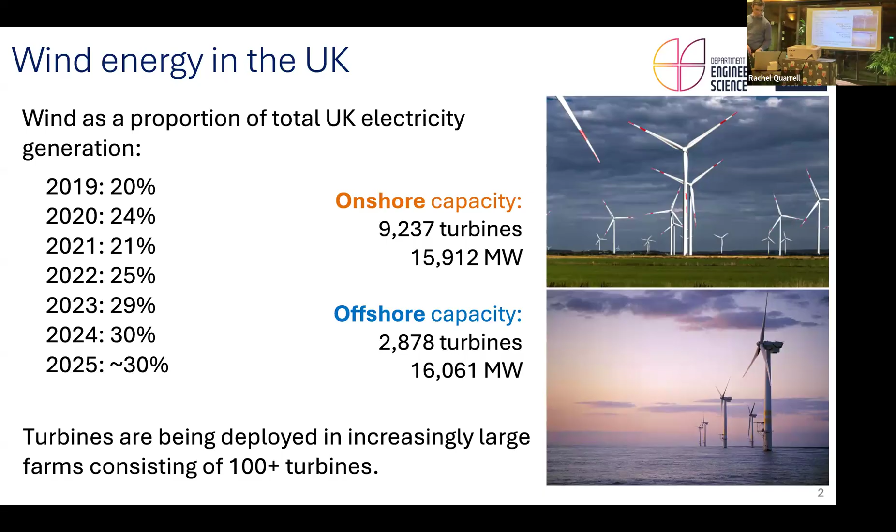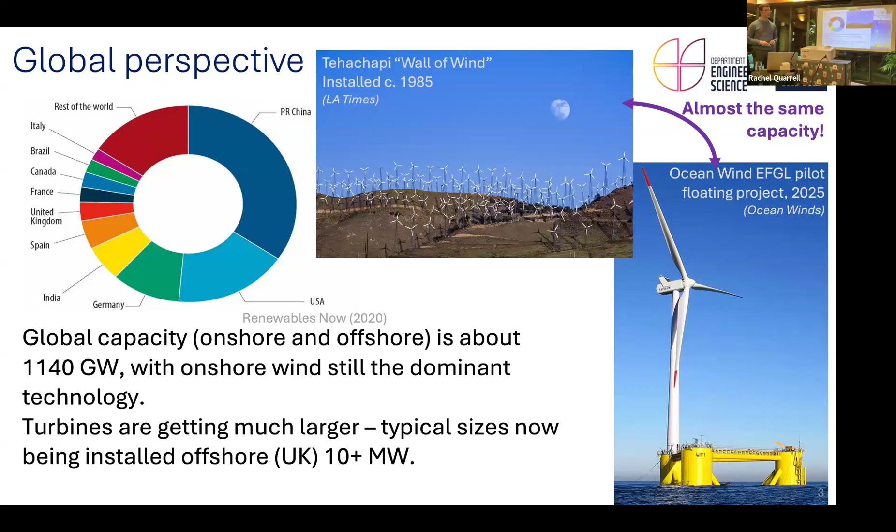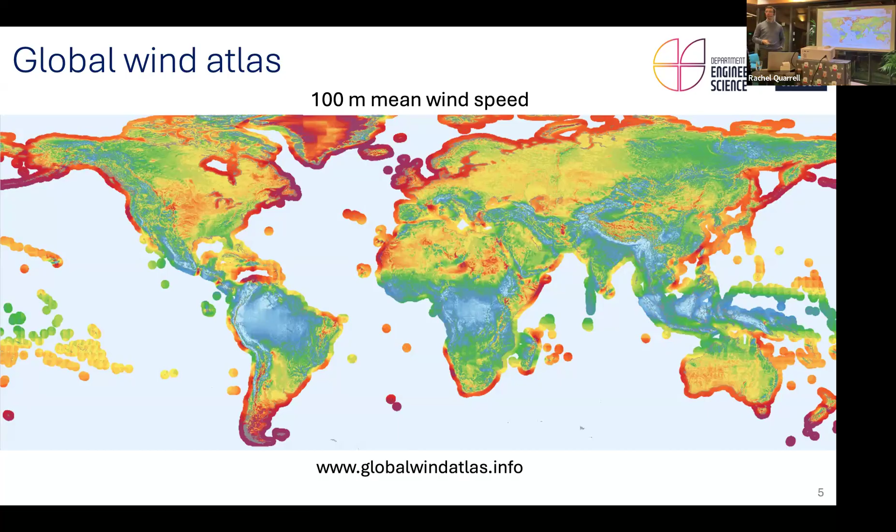And so that is why you want to build a tall wind turbine, because the winds are higher above the ground. And that change in wind speed with altitude is quite a complicated process. It depends also on atmospheric dynamics and so on. But it's a really important thing to consider when we think about how much energy do you expect to get from your wind farm, how tall should I build my turbines, etc.

And actually, even just as one blade sweeps around, it sees a much different wind speed at the top position compared to the bottom. That's quite important for the unsteady loading that you get that ultimately determines the lifetime of the blades.

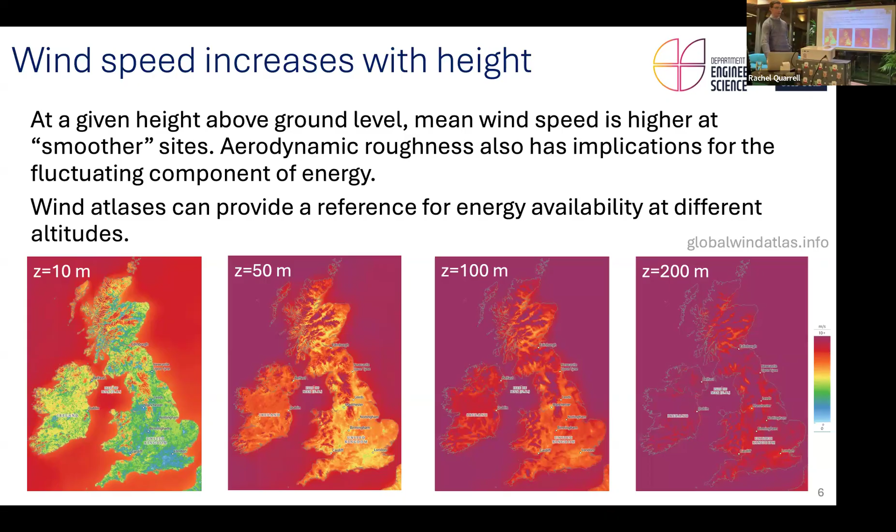This is where my ability to use a pointer goes wrong.

And that's one of the things that in Northern Europe works quite well. Energy demand is higher in winter because it's dark and cold. It's also windier. And so when the energy is available from wind is when we want to use it. There's less energy in summer, but number one, energy demand is also less in summer because the UK is really driven by heating rather than cooling needs. But also in summer you get things like solar, which could replace it. So there's a nice match there in terms of when the energy is available and when demand in general is higher.

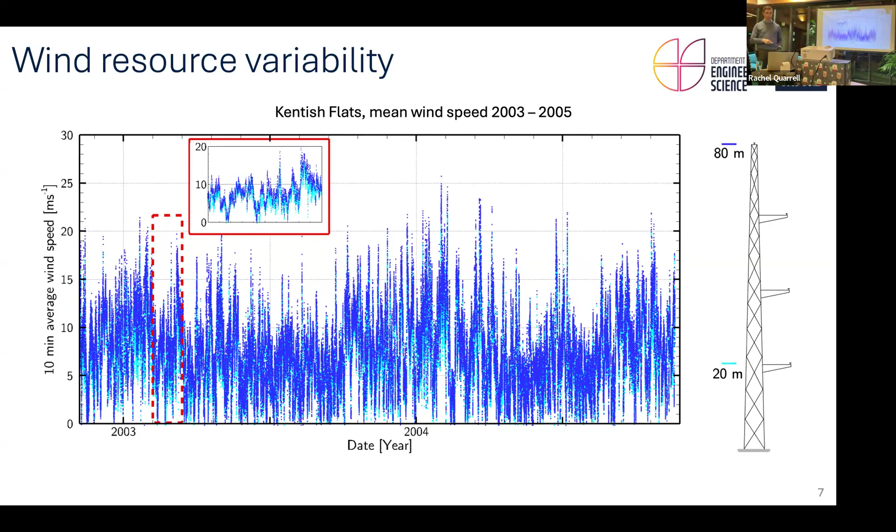One of the interesting questions is then, well, what happens when the wind doesn't blow? And this is a problem that we have already, but becoming more and more of an important problem as we rely on wind energy more. So we get these things called wind droughts, or there's a German word, kalte Dunkelflaute, which is cold, dark doldrums. When do you worry about the wind not being there? It's when it's cold, so everyone's wanting heating. It's dark, so they want the lights on, and there's no solar, and the doldrums, so there's no wind happening.

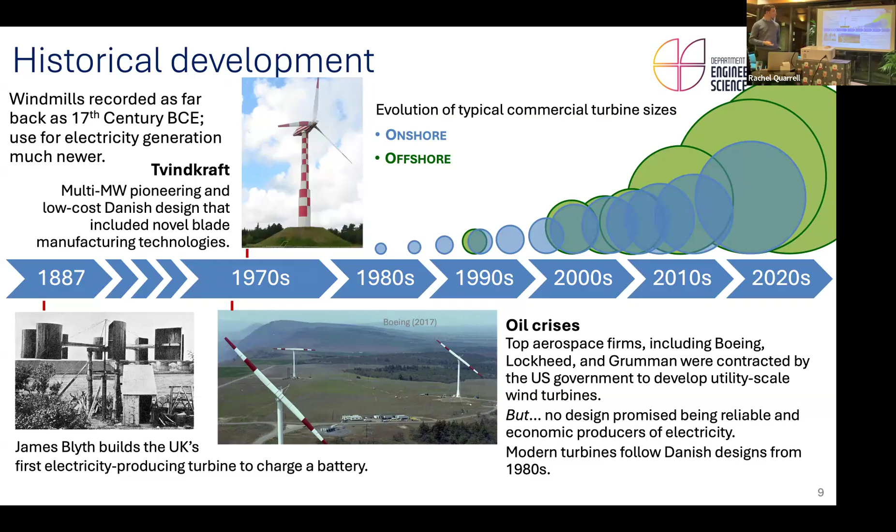Really interestingly, blades are laid up by hand. They're made out of glass fiber composites because those are very light and offer good performance. But they're so big that you build them by hand. They aren't automated, largely because, number one, building an oven big enough to cure a 100+ meter long blade is a very expensive thing to do.

But also, how do you automate a process where the thickness of the skin is something on the order of tens of centimeters? There's a lot of heat generated from that process. Getting them to cure in a reliable way that you can automate is a really difficult process. So it's incredible that this thing is made by hand.

Turbine cost is something on the order of a couple of million dollars per megawatt. So the big turbines are obviously more expensive, but actually the cost per megawatt is pretty consistent there. One thing I'll say, the biggest turbines being built in Europe at the moment are about 15, 16 megawatts. There are a few concepts for bigger ones. The Chinese are really going for it.

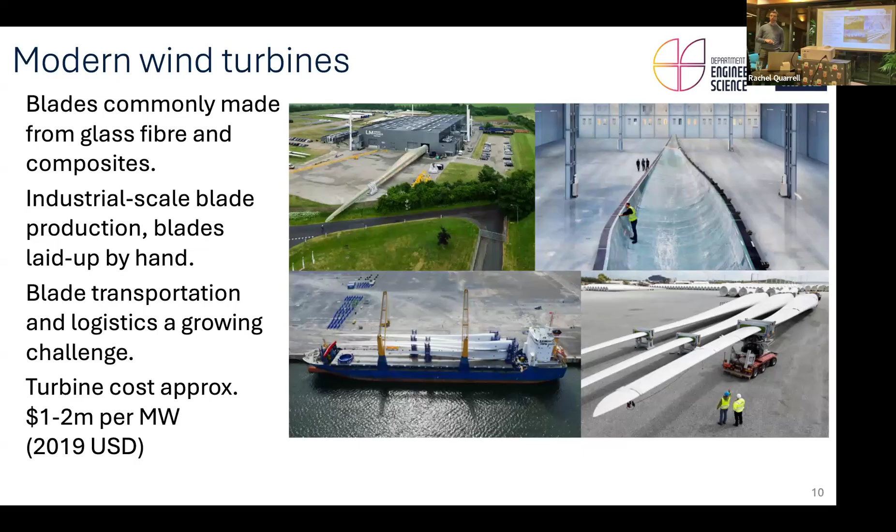They've got designs for a 26 megawatt single rotor, putting two of them onto the same platform to make a 50 megawatt turbine. Just to put that in perspective, 50 megawatts is a decent sized town of power. So they're really getting quite big. Obviously, we don't build just a single turbine, we put them in farms.

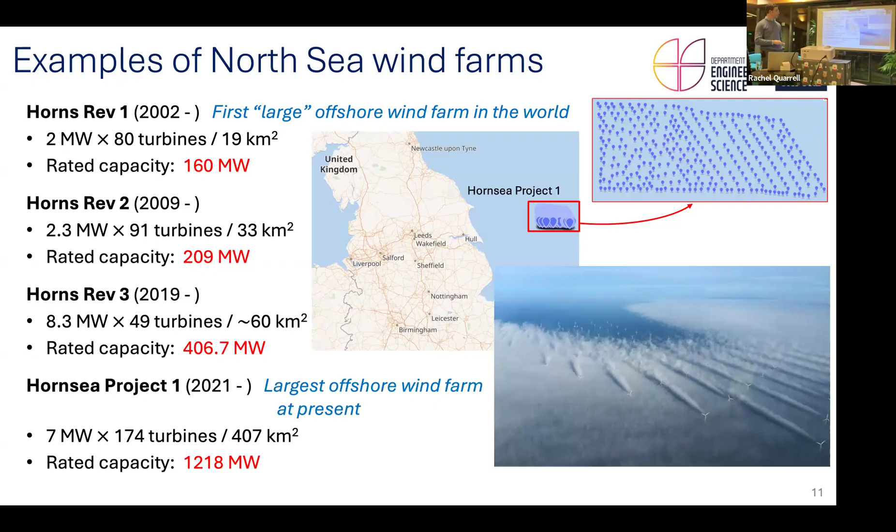But the takeaway message from all this is it's a complicated thing, and it has really significant impact on the overall performance of a wind farm. So if you took 100 wind turbines on your farm and multiplied up the power of a single wind turbine, actually you're getting 10-20% less than that because of these wake effects. They change all the time, which is quite complicated.

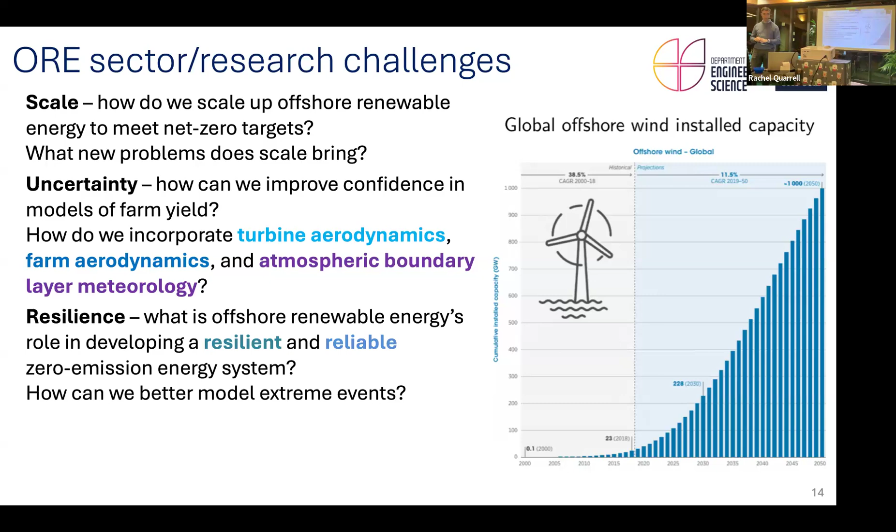If you think about the large wind turbines that we've got out at sea, you've got maybe a few tens of meters, 50, 60 meters of steel below the seabed. The water depth is maybe 40 or 50 meters. So you've got over 100 meters of steel tube below the waterline. And then the tower is another 100 and something meters above the waterline. So there's a huge amount of steel, and really, really big structures involved in supporting them.

There are other ways you might do it. And it really depends on what the seabed conditions are and the relative costs of steel versus labour, etc. So there's a lot of different design choices, even when the 3 blades spinning around looks the same. So I hope that answers the question.

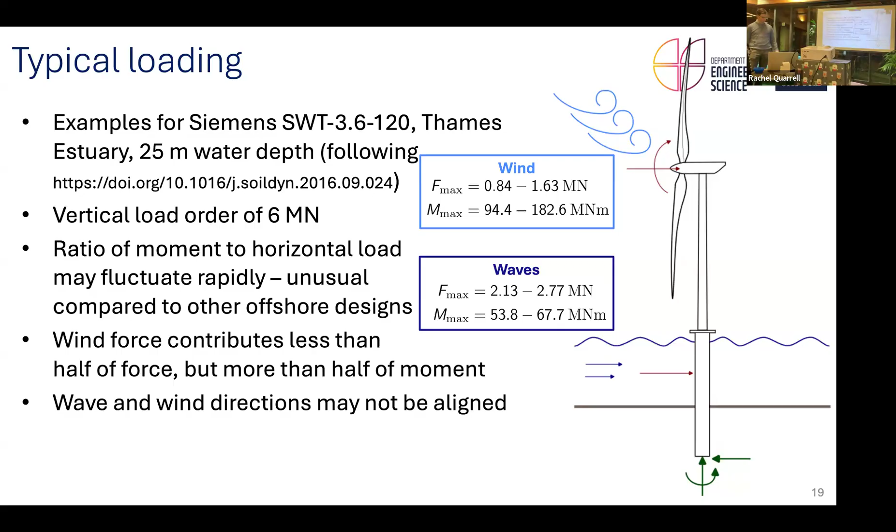Just one point on that. If you live on the windy side of the UK, you might be quite glad if the general wind speed reduces a bit, and it might not be a problem for generating electricity.

There's a couple of questions about if the UK has enough storage capacity for the energy produced and whether that's comparable to solar or other methods of production. Yeah, so I was actually just having a chat in the break there about solar versus wind, how much capacity we're trying to build. It's a really interesting question. If you go up to 2050, it's very hard to find, we're going to build X number of gigawatts of offshore wind. You see numbers on the order of 100 gigawatts, and the sky's the limit. And it really depends on what you think we're going to need to be generating when we go that far into the future.

If we rewind 10 years, the numbers were calculated on, well, we're going to decarbonize heating, so that's going to mean lots of heat pumps. We're going to decarbonize transport, so that's going to mean lots of electric cars. No one was talking about data centers for AI and Bitcoin, etc. Whereas people are talking about reactivating old nuclear power stations now to produce enough electricity for these things. So the target is moving, and that makes it quite hard to evaluate.

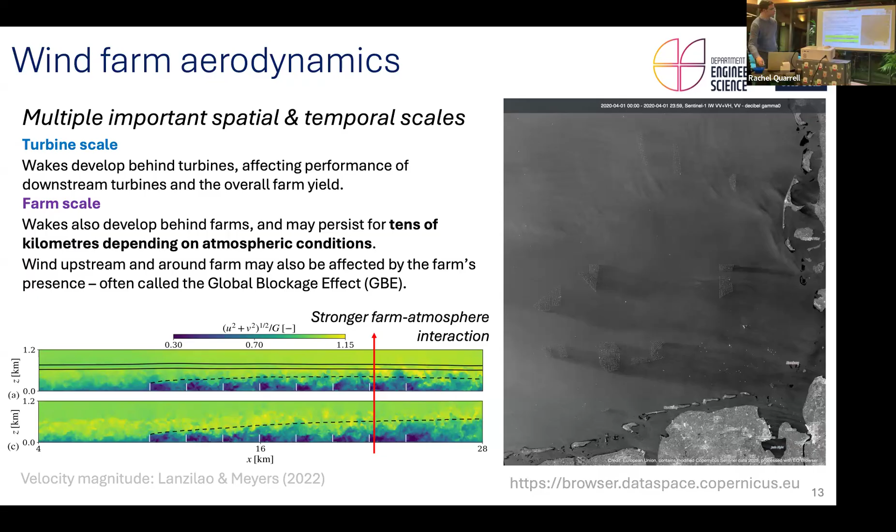A couple of questions. Yeah. Given the very high tip speeds of the rotors, is there a common erosion there? Yes. So I'm not sure whether I've got a photo of that in my bonus slides. So the question was about erosion on the ends of the blades. I don't have a good picture. There are some really interesting photos you can see online of this.

So we've got this blade traveling around close to 100 meters per second, hitting dust or even rain droplets in the atmosphere. There's a very high impact speed there, and over time, the leading edge of the blade does erode. And there are some fantastic pictures you can see online of people abseiling down these blades. The person applying a protective film looks absolutely tiny compared to the blade, because that's just how big these things are.

But yes, repairing the front edge of the blade is a really challenging process, and it's a really important thing to do, because over time, as that erosion happens, the aerodynamic performance of the turbine reduces. Knowing that it's happened is also a really hard thing to do when the turbine's way out at sea and you can't see it. But that's a really important problem.

The other thing that can happen, actually more temporary, is ice forming on the blades. This is for my pilot friend over there. Why do you de-ice your aircraft before takeoff? You want a really smooth surface for good aerodynamics of the aircraft. Same thing for the wind turbine.

In winter, ice will form on the blades, and that disrupts the airflow over the surface, so it's not going to perform as well. One of the problems that you then get is that ice gets thrown off the blade at some point, and so then you've got these car-sized chunks of ice flying around the wind turbine. So it is a safety problem.

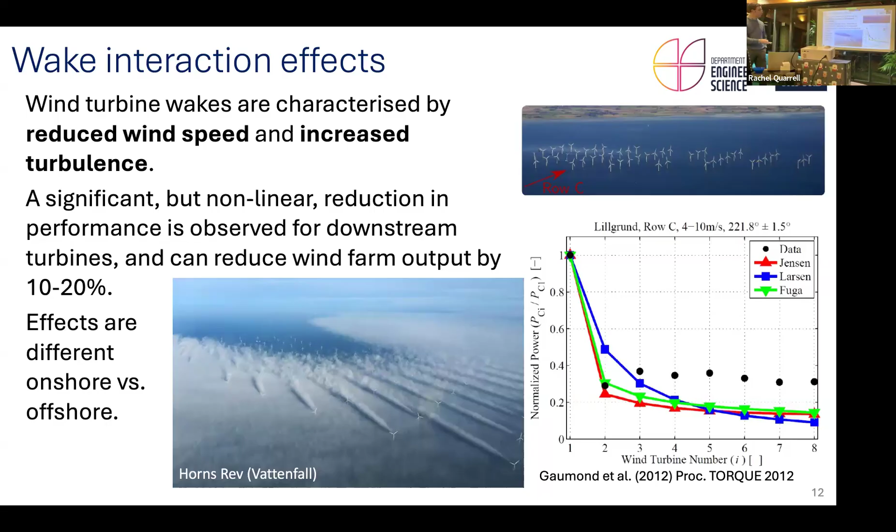Now, these are going to move around a little bit, so trying to predict where the wake is going and therefore how you're going to control it becomes even more difficult. So yeah, it's something that we're doing some research on at the moment. Very good for people with fluid and aerodynamics knowledge.

We'll do one more online. This is probably going to have to be the last.

So you've spoken a lot about the wind aspect of it. Are there sort of similarities with the wind power and tidal power? It's an excellent question, and something I could speak for many, many more hours on. The other big part of research that we do is tidal power.

So for those who aren't familiar, there's two different types of tidal energy. One, you can use the difference in height of the water, and that's called tidal barrage technology. And then there's tidal stream, which uses the fact that you're moving huge amounts of water with the tides, and so using the speed there to try and spin some blades, and they look a lot like wind turbines, but underwater. I'm doing a bit of an injustice to the technology, but you could think of it like that.

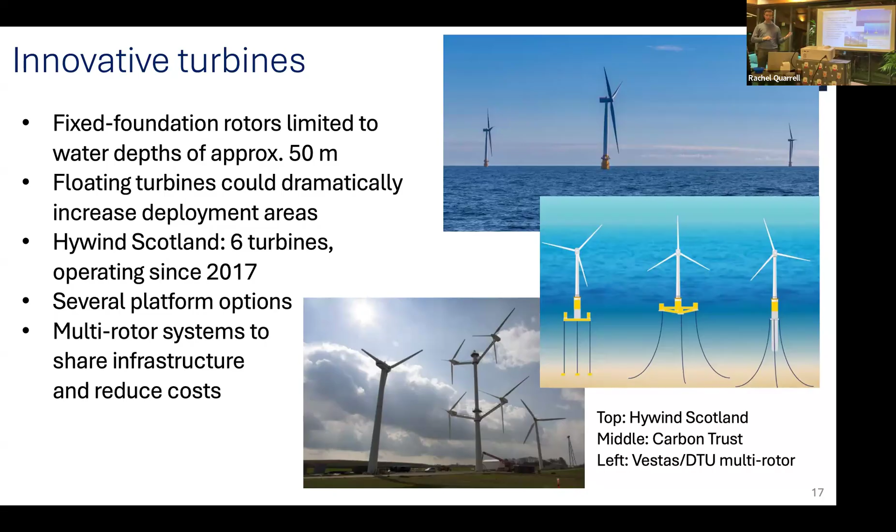There aren't as many countries in the world where tidal stream or tidal range would have such a big contribution as wind. For the UK, it's very hard to estimate how much the resource is, but it could present something on the order of 10% of the energy demand for the country if you were to build out everything. Is that economic is a different question. But the reason you might consider it is because unlike wind, which sometimes blows and sometimes doesn't, it's a chaotic system, so very difficult to predict.

The tides are generated by gravitational interaction between the sun, the earth, and the moon. And if we don't have the sun, the earth, and the moon, then we've got bigger problems than climate change. So there's a slightly pithy comment. The predictability is the real attraction there. So it's a developing technology. There's some initial farms and so on being built, but it's never going to be as big as wind because the resource isn't as large globally.

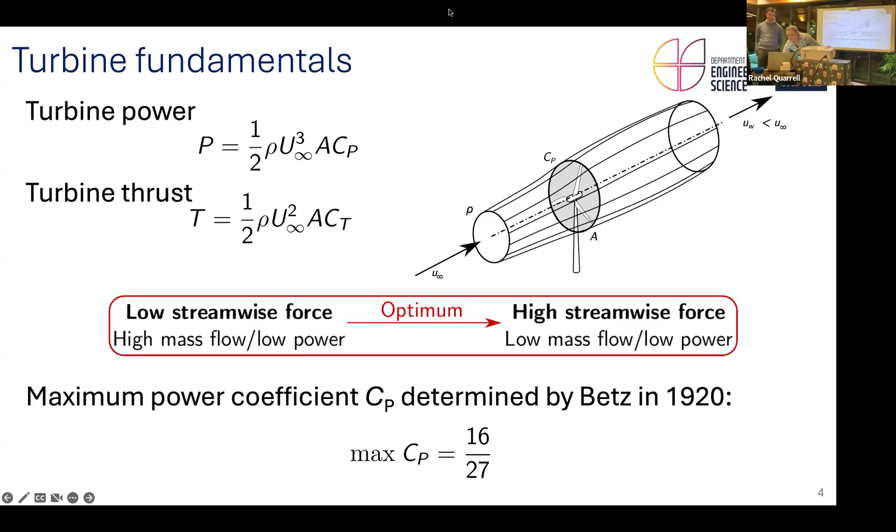If I turn this, if I do one, ooh, that's gone horribly wrong. If I do that. Okay, I think that should work. Fab, so this is just working through the questions in the chat.

Is there any evidence for the effect of offshore installations on sea currents, sandbank drift, etc.? Yes, so one of the problems that you can get in wind farms, particularly if you're installing them in really sandy locations, is you've put these big structures, the monopiles can be multiple meters, up to 10 meters in diameter. That affects how the sea currents move over the sand, and then you get this process called scour, which basically slowly the sand erodes away from near the base of the turbine.

And that's a problem, because if you remove the amount of material that was sort of helping keep the pile and the tower in place, then eventually the turbine will rotate more than you expect it to. So it does happen. How much it happens really depends on the particular location where you've installed the farm.

We've slightly touched on this, but to get a solid answer on it, does the UK have enough storage capacity so surplus electricity generated is not wasted? Well, enough is an interesting question. At the moment, we do not have enough capacity to store all the electricity we might generate if we were to do 100% wind and then reuse it in summer when there's less wind, etc.

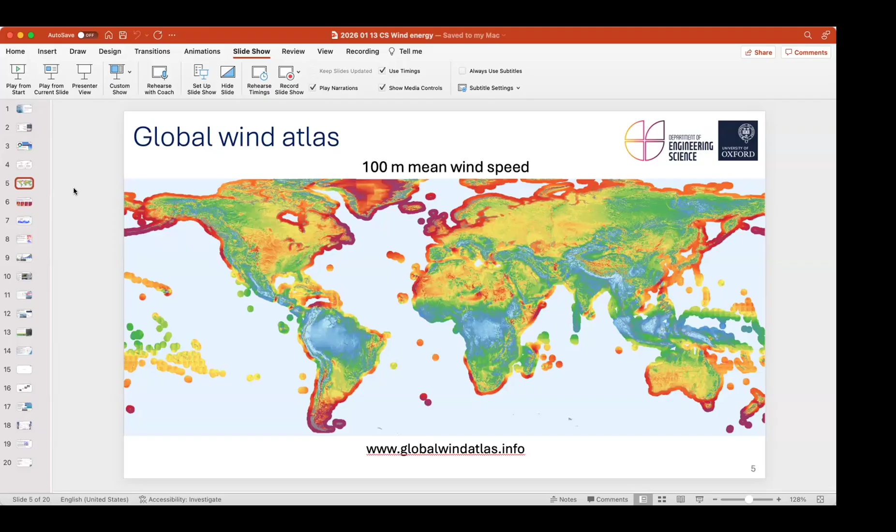On one of the slides, it looks like the efficiency of wind farms drops to 40% from a nominal 100. Is that right? And what's the main reason we don't space them out further? Yeah. So if we can just get to the slide on the screen. So I think this is the slide this question is in reference to.